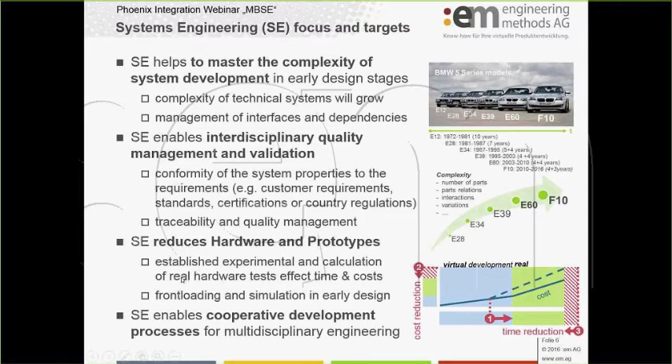So after all, systems engineering is an interdisciplinary approach in order to enable successful product or system development. We do have customer needs which need to be defined. Requirements management and engineering is the keyword here. And then proceeding with design synthesis and system validation, but also covering operation, cost and schedule, performance training, and other issues.

Based on the Systems Engineering Handbook, which is, let's say, the Bible from the International Council on Systems Engineering, we find that there are different processes mentioned in this handbook. Of course, we will focus only on technical processes today, but also there are some project enabling processes, agreement processes.

And project processes which need to be taken into account, because most of the time these kind of customers using systems engineering, they will also talk to suppliers or to OEMs. They will have a strategy on their product. So all these different processes are basically described in the SE handbook.

When it comes to the introduction of systems engineering, you need to be very focused on which portion you will focus on, which means what is your target, what is your goal in order to introduce systems engineering.

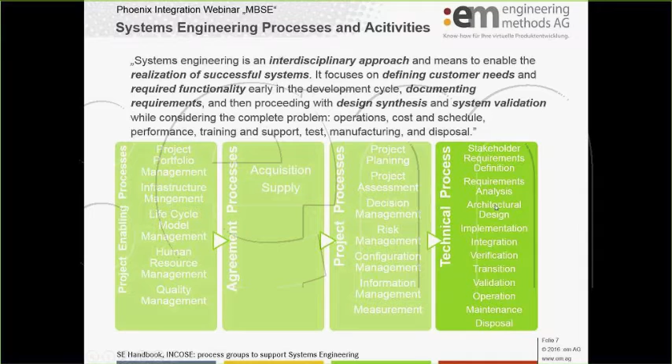So today I'm focusing more or less on the technical processes, on model-based systems engineering, which is a method, a process, and which also offers tools for the early design phases when it comes to the requirements definition and analysis, to architectural design in the concept design phase, and also implementation in order to design mechanics, electrics, electronics, and do control unit design in the machinery industry.

The technical process is also described within the so-called V model, which is very common in Germany. There's a regulation called VDI 2206, which is the design method for mechatronic design.

Based on requirements from the market, customers, or stakeholders in general, the engineering process starts with requirements engineering. We have a long tradition in Germany of doing design in a methodology-based way, talking about functional design, logical design, and physical design. Of course, this is a very simple approach to outline the system analysis, but we'll take a closer look in a minute.

The most important issue here is: what about the requirements? Are they covered? Are they described? And how can we take down the requirements within this system analysis process?

Based on a system architecture, which is the outcome of physical design, we hand over to the departments doing component design or subsystem design. Here we have specific disciplines like mechanics, electronics, and software, and we're talking about system development.

This is a very simple graphic to outline the V model, but of course we have more than one V model. Sometimes we have one for electronics, one for software, one for mechanics. We also have V models not only on our side, but on the customer side, which is the OEM for instance, or also on the supplier side.

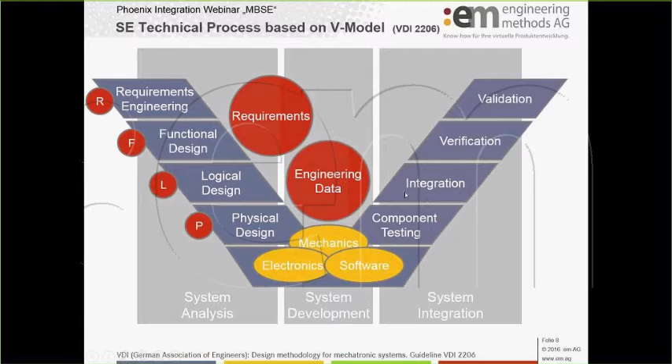Some of our customers already use XIL, which is model in the loop, hardware in the loop, or software in the loop technologies. Then we have integration within the real product or real subsystem before we verify our functional design and validate the requirements against the system which has been developed and released.

Simulation and test results will be fed back to the system analysis in order to check whether the requirements are fulfilled or not. And of course, we have a lot of iterations which are not shown in these pictures, but it's a more or less iterative process in general.

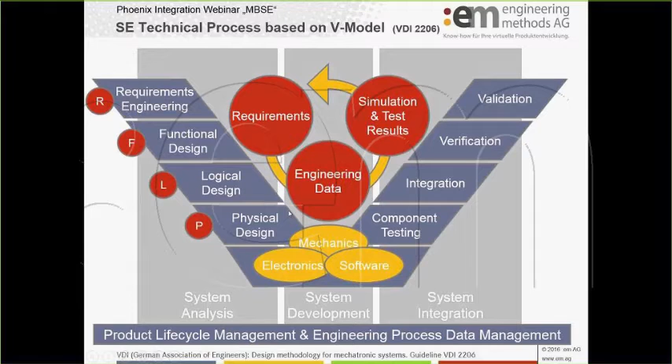Product lifecycle management and engineering process data management is key, and that's an issue when it comes to the IT environment for systems engineering or model-based engineering in general.

So what is model-based systems engineering? In the early design phase, we're talking about requirements, functional design, logical design, and there is the possibility to use SysML, the systems modeling language, to describe those kinds of artifacts within a systems engineering model.

This is based on the UML language, and some customers have gained great experience with it. Other customers, not familiar with those kinds of techniques, ask for it but need to be supported, and that's what we did at Mayer, which I will present in a minute.

You should also be familiar with the expert engineering design departments and the tools, which include mechanical CAD, electrical CAD, software environments like IDEs or CAE, or 1D behavior modeling, in order to safeguard the multiphysics models.

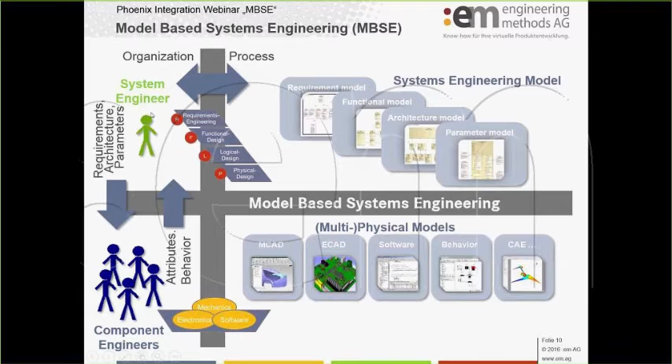Model-based systems engineering is the application of tools and models within the systems engineering process. The question is how to integrate and communicate from an early design phase, which could be led by a systems engineer, and cooperate with a component or subsystems engineer.

These are more or less used in specific departments. They have a specific need and do specific work. And the question is how to integrate and streamline the process within engineering when using these tools.

Here, Model Center, as a federative approach and solution, could help orchestrate those models and the activities I mentioned, like Scott was presenting earlier.

So specifically in some custom areas where we have a lot of different IT tools, Model Center could help not only to orchestrate different tools and streamline processes, but also to support model-based systems engineering in order to link the requirements and parameters from the early design phase to the component or subsystem design engineering, and also to feed back the results from simulation and compare whether the requirements are fulfilled or not.

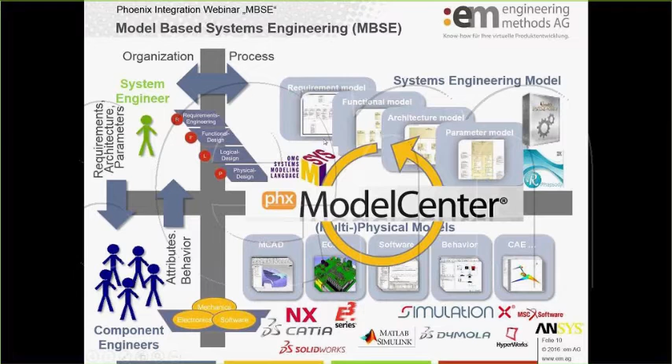So for today, I would like to show you one example taken from our customer, Mayer. Mayer produces textile machines worldwide. Market number one is China, but they are still a German-based company with their headquarters near Frankfurt, Germany.

They have different business units in order to produce different fabrics and textiles on their machines, from nice gowns to sport textiles, but also technical textiles like carbon fiber, and fiber for seating in cars, like you can see here for the BMW i3.

Besides different machines, they're also doing component design and manufacturing, and because they needed to enhance the dynamics of their machines, they went from steel to carbon fiber. They have their own component manufacturing from carbon fiber, which also delivers components to the automotive industry and other industries.

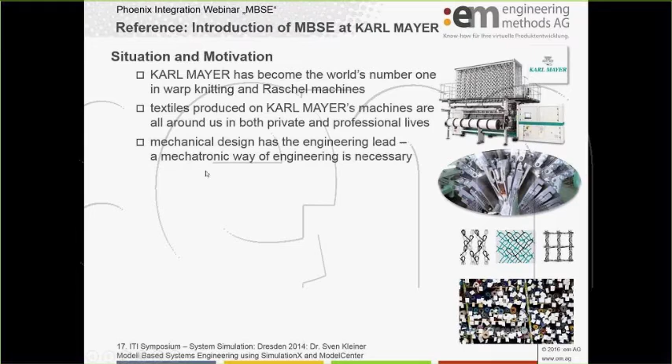So 3 years ago, the engineering manager and the IT manager asked us if we could support Mayer in going from a mechanical design, mechanical engineering focused development, to a more mechatronic-based design. The question was how they could introduce the mechatronic way of engineering in general.

The vision and goal was to introduce a mechatronic product development process and model-based systems engineering, because in earlier years the mechanical design department was always in the lead, meaning 200 or 300 mechanical engineers would start development of a machine, like a textile machine you see here, then electronic or electric design took over, and last but not least the software developers responsible for controller design took over to get the machine running and meet the specification.

So there was a need for a mechatronic product development process, and the introduction of MBSE, Model-Based Systems Engineering, which covers requirements engineering and management, and computational engineering in an early design stage in order to get rid of prototypes and hardware test rigs.

They wanted to test and learn MBSE first before deploying it on a global scale, so we talked about pilot projects first, doing laboratories on specific use cases to test whether requirements engineering and management using SysML, multi-domain 1D CAE, and other tools would fit into the engineering departments, enhancing the processes through process integration and design optimization.

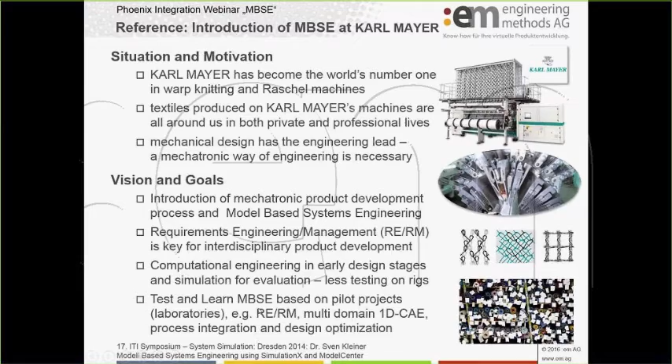When we started back in 2012, we had one lab, the string bar development. This was the first laboratory to develop according to the V model and the VDI 2206 methodology, demonstrating the model-based approach to define requirements on a full scale, addressing all different requirements, not only from mechanical design but also from electrics and software.

And to introduce Simulation X, which is a tool for multiphysics 1D CAE. Simulation X allows engineers to discover not only mechanics but the overall systems behavior, mechanics and electronics, meaning motor units for instance, but also controller design, studying the behavior of the overall machine in an early design stage, or not only the machine but also subsystems like the string bar.

The outline of this first pilot project was to define the use cases and derive requirements from those use cases according to the string bar system, to define the system architecture, and to model the system behavior afterwards. The string bar system is a very specific part where all the needles for textile machines are put on, and it's very complex and needs to be very precise in order to have really fine fabrics afterwards.

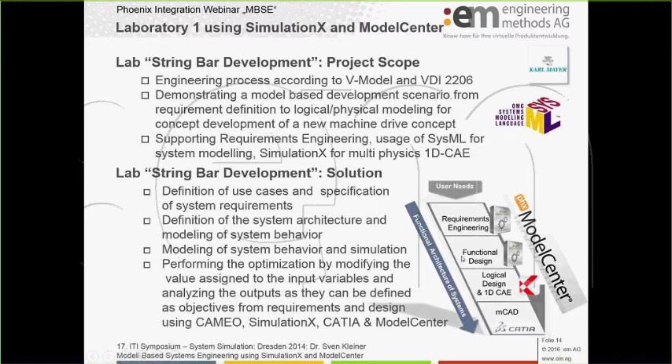So the optimization was about having a look at the motion, which is more or less a mechatronic approach, having different bars, different mechanical linkages and bar systems in order to define the movement of the needles, which you can see here, or in this picture, where you see the fabrics or the string for the fabric design.

So the first task was to design the mechatronic drive concept using SysML on a conceptual layer, and afterwards we defined the system architecture. This is a very simple representation of one of those concepts, showing the needle, which is represented as a single needle here.

We had to have a spring damper system for the bar itself, for the string bar, and we have a motor which is controlled by a control unit, and of course a pneumatic cylinder which rejects the string bars in this direction. So this was the first concept.

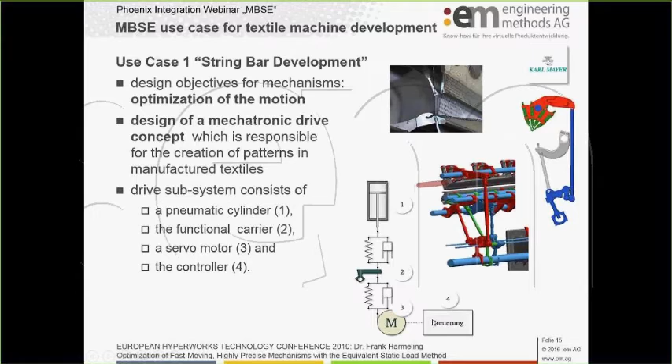We have more than 3 or 4 concepts right now which I couldn't present because it's undisclosed. But to give you an idea of what we're dealing with: it's about the mechanic plant, the mechanic process for the string bar. We have the motor unit and, of course, some control unit, which needs to be defined based on the functional architecture and the system architecture.

After all, the question was, for this use case 1, for this laboratory, which is the best concept and which is the optimal design. So it's not about the concept itself, it's also about which parameters, which dependencies we need to check, and how we can optimize the first concept design.

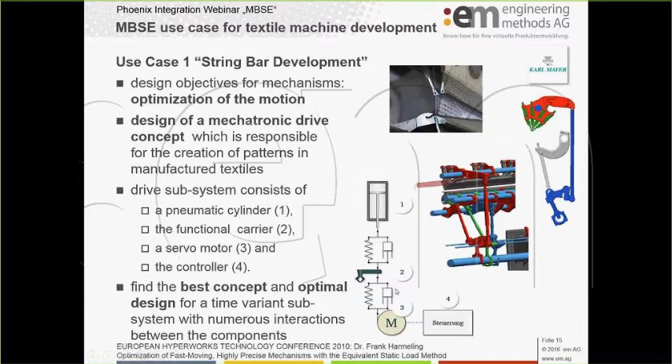So we were thinking about the engineering IT environment. There was no Cameo nor SysML editor in general available, so we decided to go with Cameo Systems Modeler, and of course Excel, which is mainly used when it comes to requirements, and we were coupling Cameo with Excel.

The SysML, of course, within Cameo itself, and for the product development, for the mechanical parts, we were using CATIA V5. There was some HyperWorks MotionView available for mechanics, dynamics, multi-body simulation, ePlan for ECAD, and of course for controller design, MATLAB Simulink, and for multi-domain CAE simulation, ITI's Simulation X.

These were standalone tools, as I mentioned earlier, so we needed a tool environment for process integration and design optimization, which was Model Center and is still Model Center at Mayer. So as you can see here, we have different aspects to cover, from systems requirements to functional design, logical design, multi-domain simulation, and physical design.

And Model Center is more or less our federated platform in order to orchestrate all these different aspects which were supported by the tools I was mentioning.

So what is the use case in practice? At first, we have to look at SysML modeling. Based on the specifications, we developed a requirements management for system modeling, and based on that we were deriving functions, a functional structure, and decided on some key parameters in order to derive the system architecture.

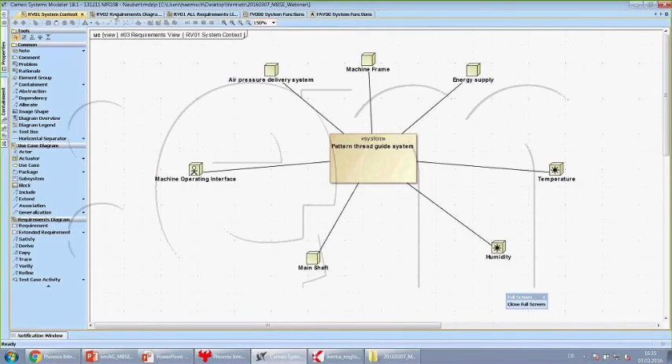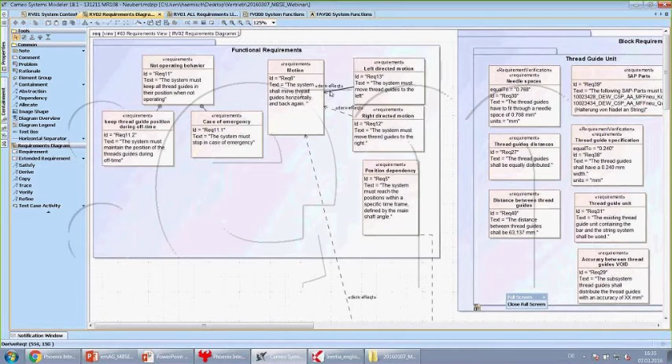So we would start out by putting our system in the middle here, and first look at what will influence our system and what will be influenced by our system, creating a context map of things around our system so we can see where we should interact and where we get requirements from. Once we get the requirements, we put them into this diagram form. The advantages are I can use the requirements, organize them, and put them into dependencies from each other. For instance, this one is derived from this one, so I can organize or prioritize them in any way I would like.

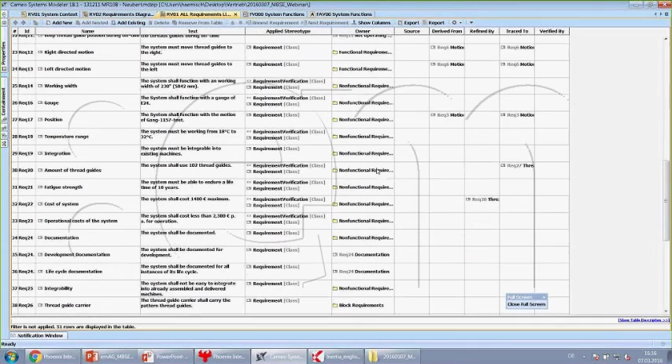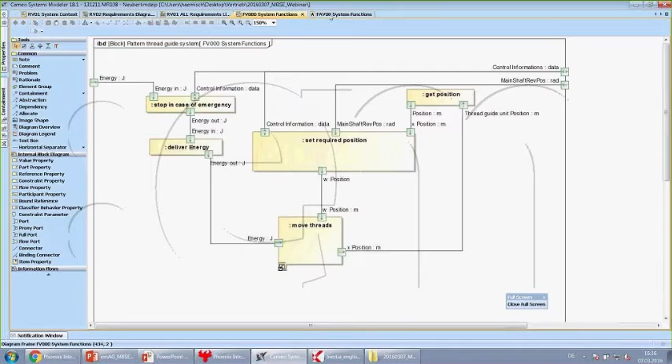But I can also use the Cameo modeler to get a requirements list, as you might have in Excel, Word, or IBM DOORS. Then I can derive a functional view of things and get the functions my system needs to fulfill, and the information, data, and energy transferred between those functions. As another advantage, I can do evaluations of this. The requirements are displayed here, and I can check if every requirement is fulfilled by a function. I can do this in later stages as well, with the architecture, components, and so on.

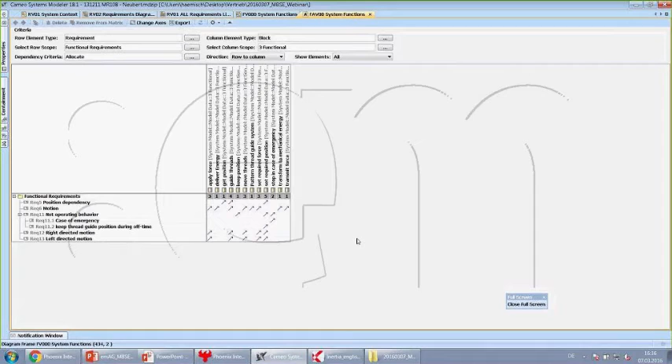Okay, so much for requirements in FMEA. I will now give back to Sven.

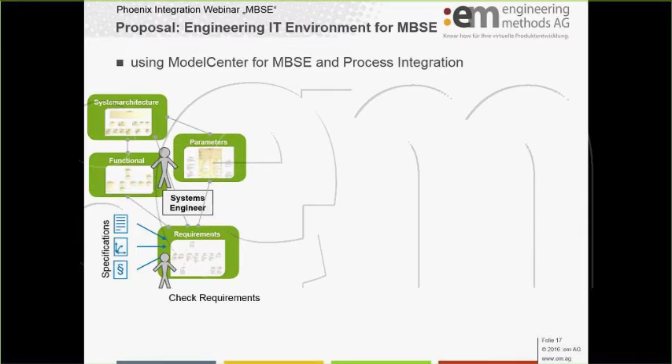Thanks, Robert. Having this system architecture set up, the next step is to hand over to the experts, the domain experts from different disciplines. Here's a picture of how ModelCenter supports this process, from early design based on SysML models to the domain models. The question is how to check if the requirements are fulfilled or not. So we hand over the parameters, do some simulation, which we'll see in a minute, and then feed back the results using ModelCenter MBSE Pak in order to give the systems engineer the capability to check whether requirements are fulfilled or not.

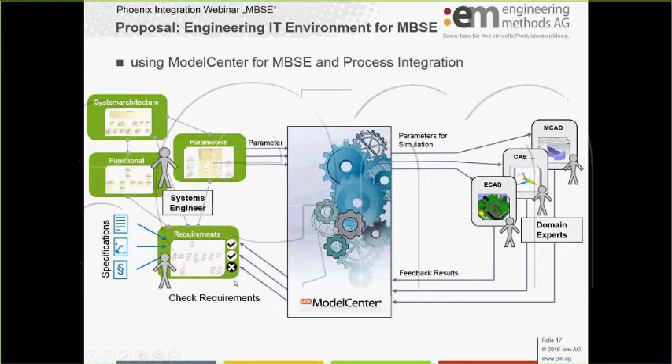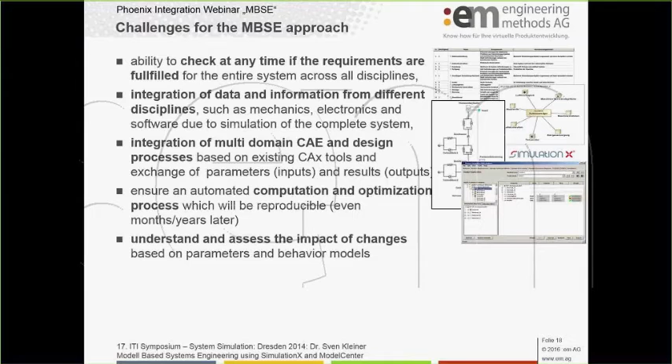So the question is not only to check the requirements at any time, but also to integrate data from different disciplines and different tools, especially when it comes to simulation using SimulationX, and to ensure that if we have more variants and more parameters to analyze, we can optimize this kind of process to streamline the engineering work. Of course, the feedback will also result in an understanding and assessment of the impact of changes. If you change parameters or concepts, what will be the impact? That's a question which will be answered by ModelCenter MBSE Pak as well, in order to optimize the computation and simulation process.

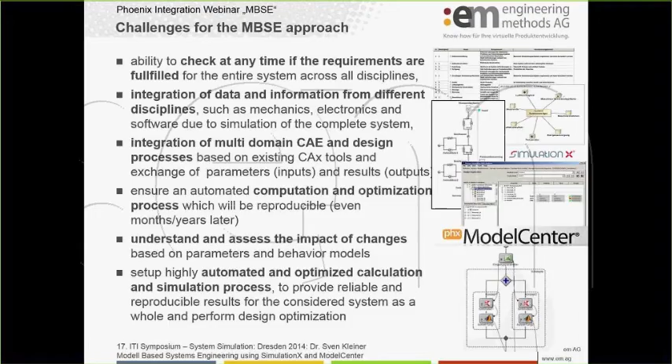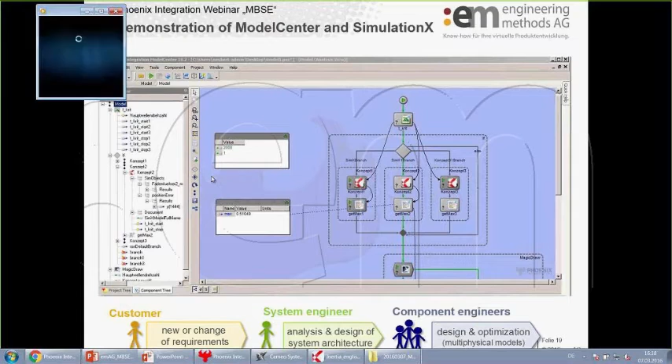To run the demo in short, we prepared a video showing the environment for ModelCenter, the framework, and the different tools integrated. We have some different concepts set up to investigate our design concept. This is concept number 1, which I was outlining before, and concept number 2 and 3. You can see here how ModelCenter MBSE Pak will feed back the results from simulation and compare them with the requirements.

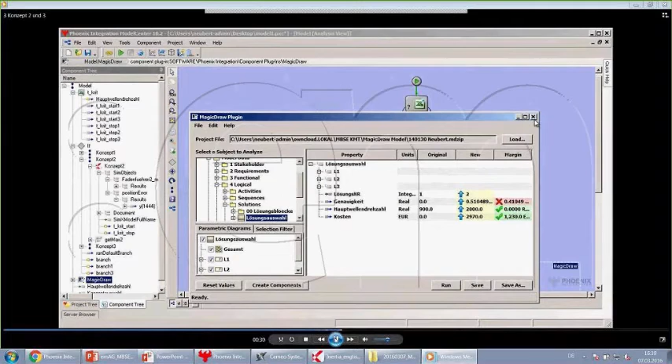For instance, whether the positioning will be achieved or not, or some other requirements will be fulfilled or not. You can see here the positioning is not fulfilled, so we need to change the concept or some parameters within the engineering and simulation model, and run another simulation task to check whether the requirements are fulfilled.

So ModelCenter and MBSE Pak will help us understand the overall conceptual design at an early design stage and safeguard some parameters. The ModelCenter framework, the overall model, consists of the simulation model, represented by 1D simulation within SimulationX on one hand. On the other hand, you can see some icons representing the Cameo requirements model and parameter model, which will be linked to our simulation to check if the requirements are fulfilled or not.

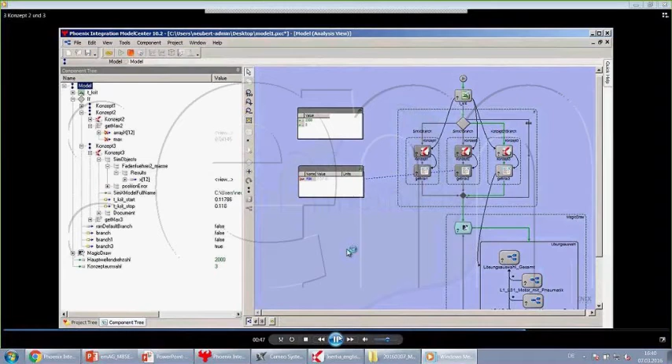We can close this video here, and I will show you later a URL where you can check this video and some more information if you like.

So back to the presentation. The results from this first lab was that MBSE, based on the VDI and the functional architecture of systems methodology, could support the systems analyze and design.

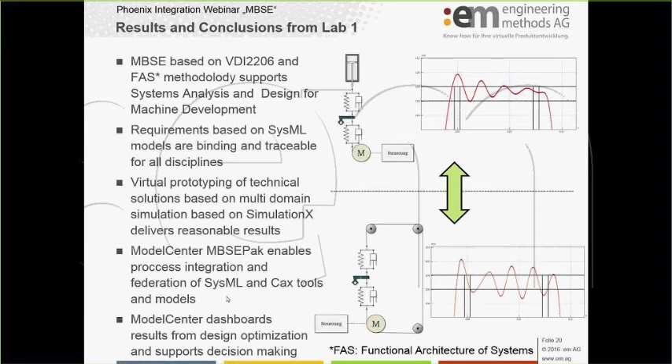So after all, the result was that ModelCenter dashboards the results and can enable MBSE at Mayer. That's why we come up right now with another use case. At first we started also with a laboratory, but since last year, end of last year, this is really used in productive design and helps the engineers at Mayer to streamline their processes.

So I will hand over to Robert again. Okay, so the use case is the following.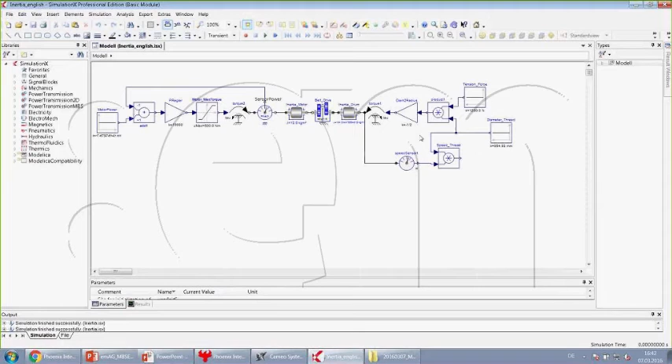So what we did here is provide a 1D simulation of the whole system. It consists of 3 parts. We have the motor on the left side with the motor power, a very basic controller, and the maximum torque. Then we have on the right side the thread itself, which pulls with the force because it needs to be in tension. And so what we need for a simulation is the inertia of the drum that we will be using. We might be using different drums in different machines.

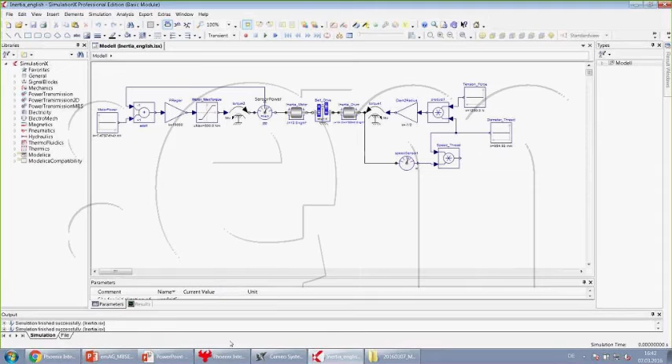And we get that drum from a CAD model in CATIA, and now it needs to be supplied into the Simulation X simulation, and that's where Model Center comes into play. We have a model in CATIA which is parameterized, and we can enter these parameters here in the Model Center GUI. And then I will do this right now.

This is live in the tool. I can enter a value here and then redesign the part in CATIA. So now CATIA will measure my inertia right here, and I need to give this inertia over to Simulation X, which I can do using the link editor.

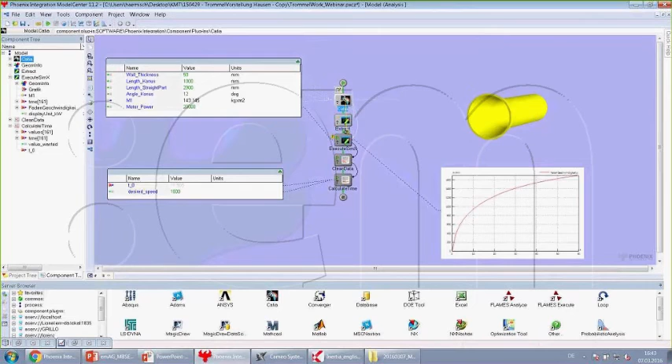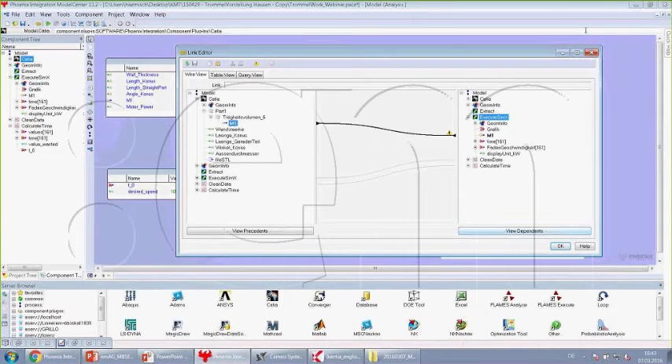So I hover over here, and I slide this down, and then I go into my CATIA. I get the value that I want to give from CATIA to my simulation X, and then via drag and drop, I can make this line, which symbolizes just the connection between these 2 software tools, which Model Center helps me orchestrate. So I give this to the simulation X, and then I use the scripting component to get some more data from it.

In this case, it will calculate when a certain desired speed is reached after what time. Just to show you that instead of just orchestrating tools into your workflow, you can also script stuff yourself, which is being done here. So let me just change a little something. I will take the power of the engine of the motor down a little bit and start the workflow.

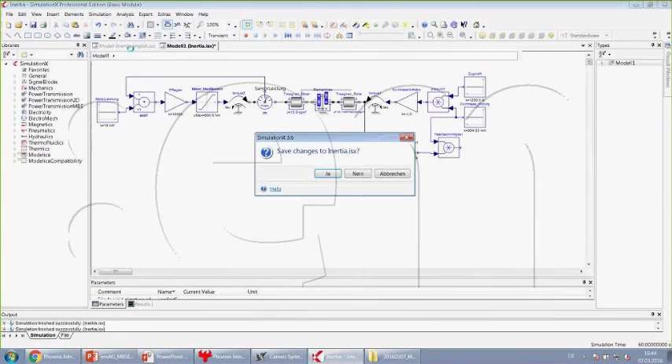And as you can see, it's running now. It's running the simulation in Simulation X. I'm sorry about this, it's not going to work because I need to close this. I'm sorry for this hiccup. I need to close it so that Model Center can run smoothly.

All right, so let me do this again. I changed the power of the motor, and now CATIA will redesign the drum, and Simulation X will run the simulation with the new values measured by CATIA, then hand over the results to the calculation and give me my new time where my desired speed is reached. And yes, it's finished now, and as you can see, the time has changed. It's gotten longer, which makes sense because the power went down.

Now what I have here is a workflow which I don't have to do any manual work anymore. I put my models in, and Model Center will just help me transfer the parameters. So it will really help me if I do this lots of times. What I can do with Model Center as well, with the Explore part of it, is do a design of experiments: just get variables as design variables, define some ranges, define a search pattern, and then just run a lot of runs at once.

I'll just show you very quickly how easy it is. I can just drag and drop my response that I want to measure, my time where the desired speed is reached. I can drag and drop it in here and then start it. Of course, I won't do it now, but I have earlier today, and I would like to show you the visualization.

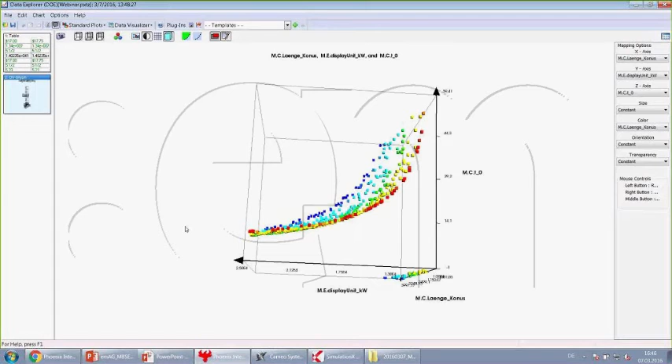So this was 500 runs, and what we can see here is every little cube represents one run. Now we can get a very good understanding of the system at hand. For instance, which makes sense, if I give my motor more power, of course the time to reach a certain speed goes down. And I can analyze this the other way around. If I enlarge the part, if I enlarge the drum, the time to reach a certain speed will go up.

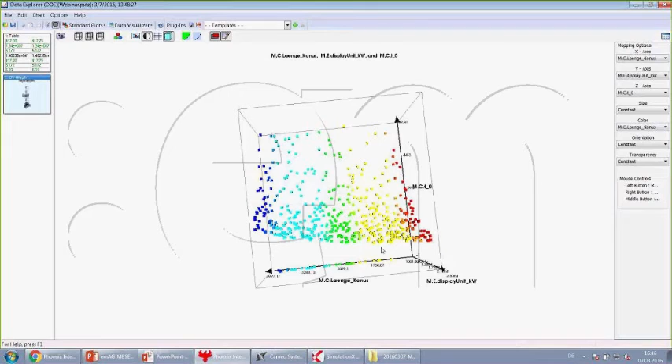So much for the use of Model Center and MBSE, and then it's back to Sven again.

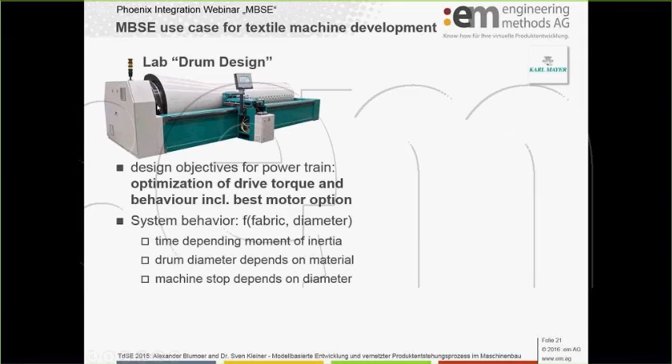The objective today is for drum design to go from requirements, different machine types for different textile machine environments, in order to set up the right powertrain unit and the right parameters.

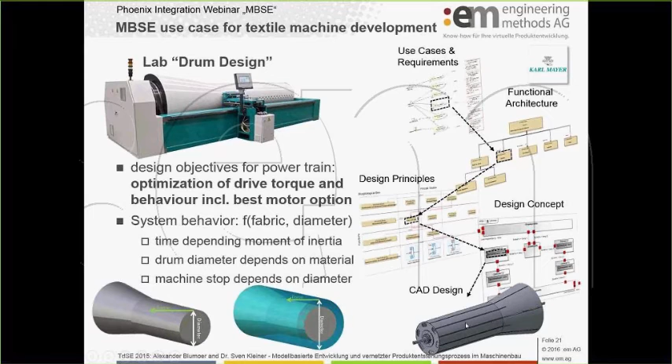At Mayer, within the Department for Drum Design, they're now using SysML for requirements engineering. If a new concept is necessary, they go to doing a functional architecture. They represent their design principles within SysML as well. The interconnection between UML, SysML, and CAD design is managed by Model Center.

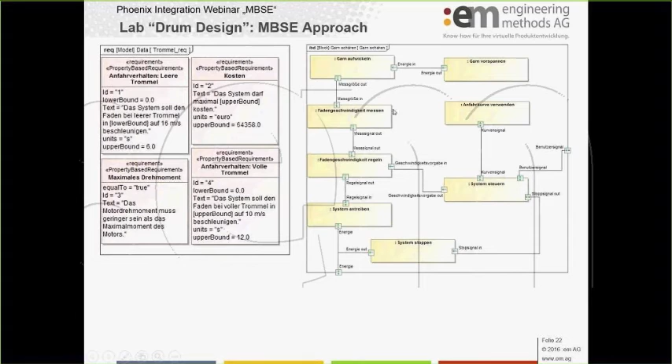Like you can see here, today they have a specific requirements model based on the main requirements. They have a display in order to understand the functionality of their drum system, which is now a common language not only for mechanical engineers but also for the electrics, electronics, and control designers.

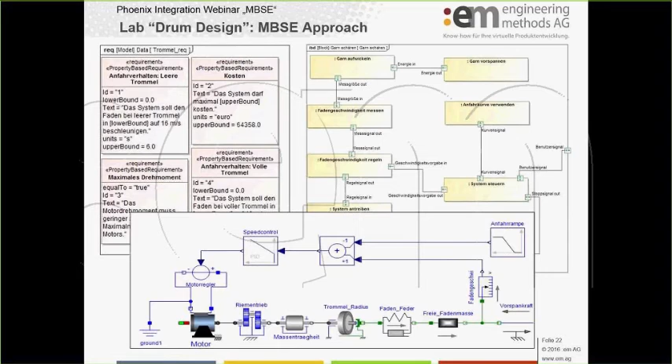And of course, this Simulation X model was very helpful in order to evaluate designs in an early design stage, or to do some parameter studies or some optimization. So Model Center is now one of the key solutions within the design department when it comes to drum design.

What are the experiences we took from Mayer, or Mayer took by itself, during the last 2 years? They found out that Model Center is the tool which can integrate different tools within the engineering department, which can support parameter and design studies, and also design optimization, including links to MATLAB Simulink or Simulation X.

And of course, they can have a really good understanding by using the dashboard and reporting functionalities of Model Center. So the outcome is that they gained a higher understanding, because interdisciplinary communication is supported by using different tools, but also Model Center for federation.

They can now trace the requirements. The main requirements, which are the most important ones, can be carried through the design steps which we outlined today.

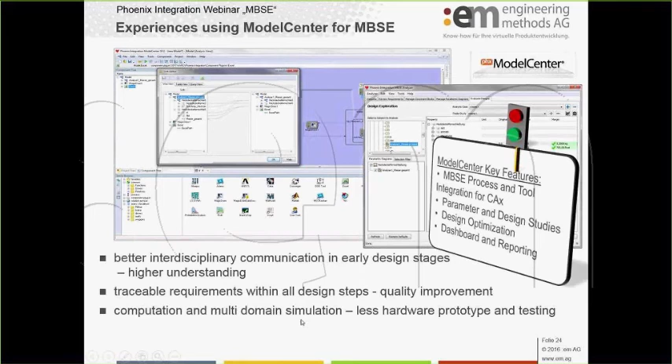And of course, the first step for multi-domain simulation results in fewer hardware prototypes and testing. So of course the parameters for all the simulation models need to be identified, but we can have upfront simulation before one or two prototype and test rigs are used.

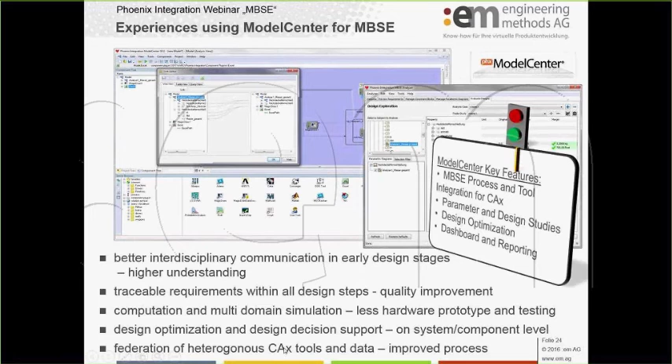And of course, design optimization and design studies using sensitivity analysis or design of experiments helps support decision making. And last but not least, because of Model Center's integration capabilities, different tools could be linked and coupled in order to streamline their engineering process.

So last but not least, I would like to summarize that the Model Center approach and the MBSE approach could optimize the mechatronic development process.

The systems engineering approach, based on the functional architecture of systems methods, could faster adapt to requirements and control changes. And of course, we need to have an environment which can support different best-in-class tools by doing integration within an existing IT landscape.

Last but not least, it's always important to talk about strategy when it comes to the introduction. At Mayer, we decided to have some laboratories first, because they were very weak when it comes to systems engineering 3 years ago.

Then we decided to convince the key stakeholders, the engineers, but also the management, by having some use cases, some laboratories. And now, after 3 or 4 laboratories, we found out where the use cases are which can be supported. But of course, we also failed in some laboratories.

So to be honest, not every use case was supported successfully, in terms of tools, but also in terms of organizational architecture and understanding. So there's still a challenge to convince everybody to introduce MBSE.

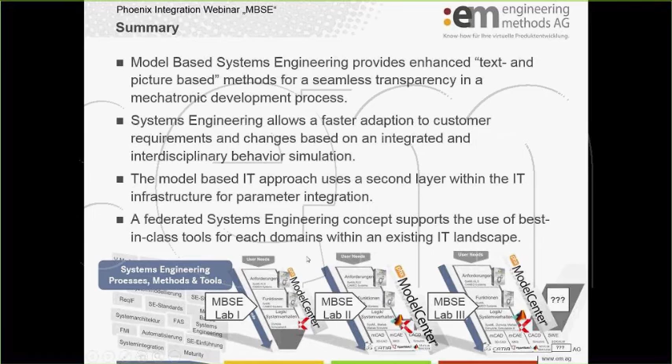But like we showed today, there are some really good reference stories where we can convince not only customers but also general stakeholders. So thanks for your attention, and we are ready to take your questions.